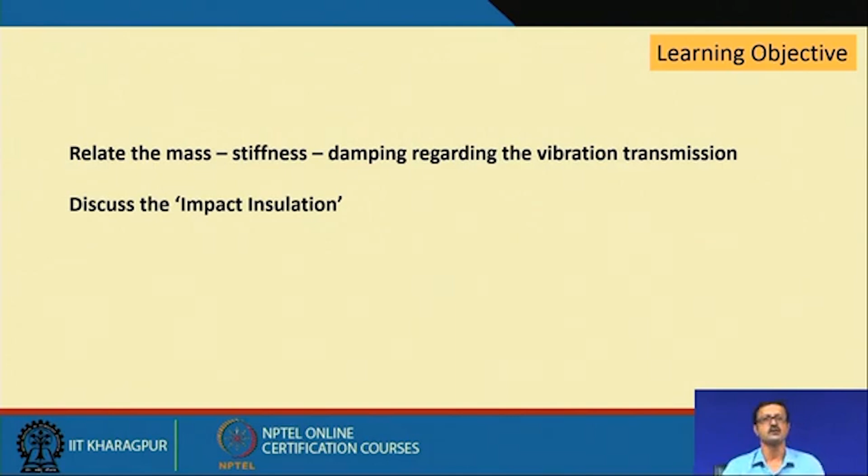Welcome to the NPTEL certification course on architectural acoustics. We are now in the 7th week, and this is the last lecture on structure bound sound transmission 2. In the last lecture we discussed some primary parameters of structure bound sound and how it is influenced by those parameters. In this lecture we have two learning objectives: we will relate the mass, stiffness and damping in the vibration transmission point of view, and also discuss a bit of impact insulation.

Before we discuss the relation between mass, stiffness and damping, let us discuss the barrier of trenching. If you remember, in the last lecture we talked about the source, the path, and the receiver. Sometimes a structural discontinuity in the path gives you noise reduction, structure bound noise reduction.

Sometimes some kind of mounting in a particular machine will stop or reduce the propagation of sound from the source itself. Sometimes we have to protect a building or noise sensitive area from sound transmission, which can be done through the trench barrier.

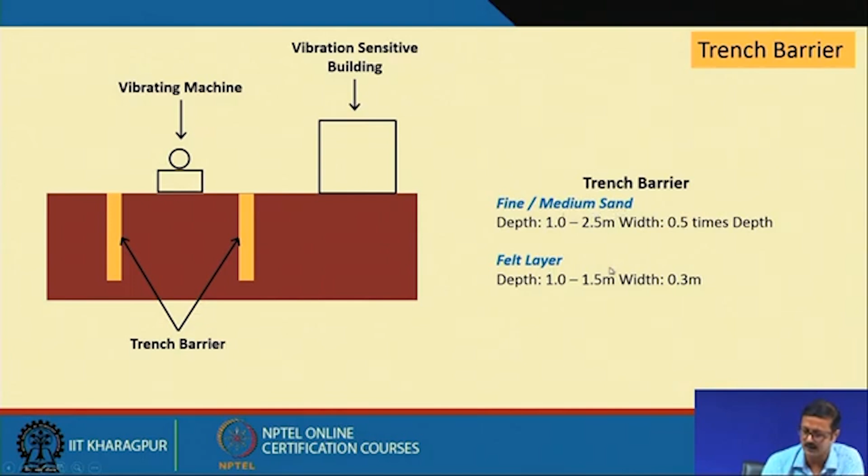In the trench barrier, two trenches are made in the soil or ground, and a vibrating machine is placed between them. This trench may be filled with fine or medium sand, or a felt layer, and with particular dimensions it can reduce the propagation of sound. In this zone of soil or base, the amplitude of vibration will be very high.

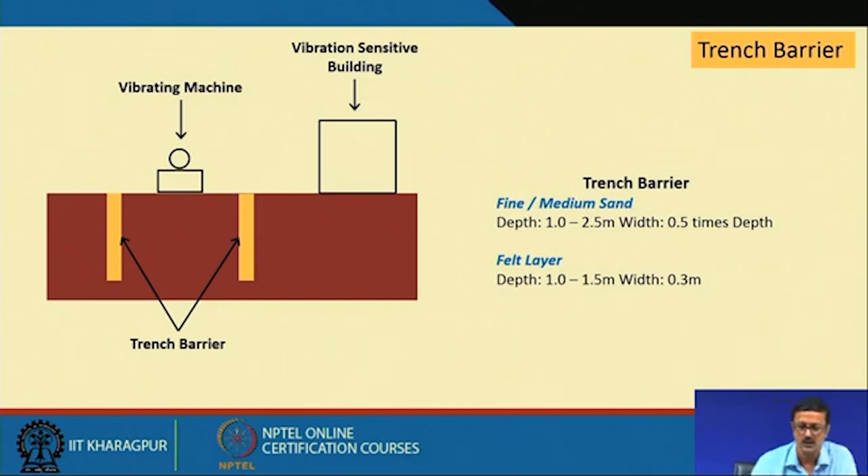But when it crosses into the trench, there is damping, and due to this damping and absorption of sound or mechanical energy there, the amplitude will be reduced. So, by virtue of this trench barrier, you can protect vibration sensitive buildings also.

We can also think of this trench barrier using a wooden or metallic barrier, where a railway or industrial area having a vibrating zone can be safeguarded. The propagation of vibration can be safeguarded through this trench, and the noise sensitive or vibration sensitive building can be protected by it as well.

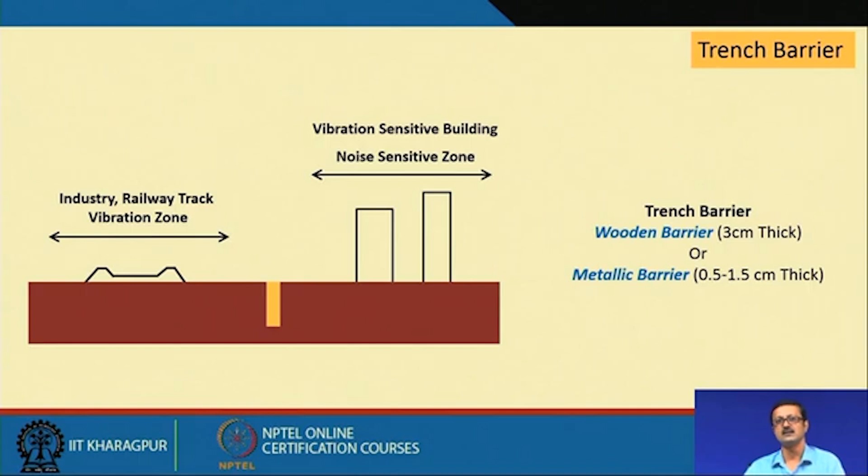So, we can use some kind of wooden barrier, metallic barrier, or some flexible padding systems as the trench.

Next, let us go to vibration isolation. In case of objects, machines and systems having a spring and damping, if you remember in the last lecture, we discussed free vibration where there is no damping - a machine freely vibrates with its own natural frequency. Here also it will vibrate with its own natural frequency.

The only change is that here a damping dashpot has been added. This means the machine is now on a damping layer, which can act as a vibration isolator and absorb the mechanical energy. So, what will be the fundamental free body diagram of this particular system?

A mass is acted upon by a force - an external or operating force - and due to this force, an equal and opposite resistive force develops: one through the system's stiffness, which is k into x, and one through the damper we have introduced, which is the damping coefficient c into x dot.

X dot is dx/dt, the velocity of the movement. Because of this force F and these two resistive forces, the mass will have some resultant acceleration, x double dot. And m times x double dot is the force experienced by the mass, which equals the resultant force F minus k x minus c x dot.

So, if you rearrange the equation, it will be like m x double dot plus k x plus c x dot equal to 0. This is again a second order differential equation, and the solution of this differential equation will be in exponent terms, with two roots r1 and r2 found from this equation.

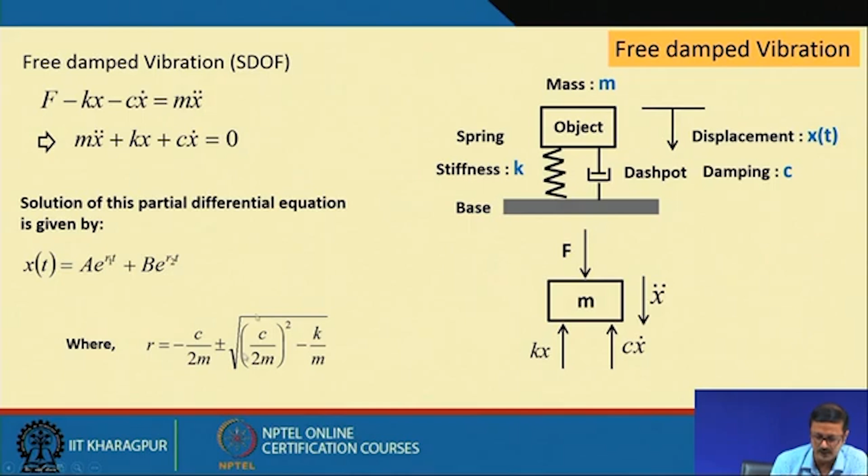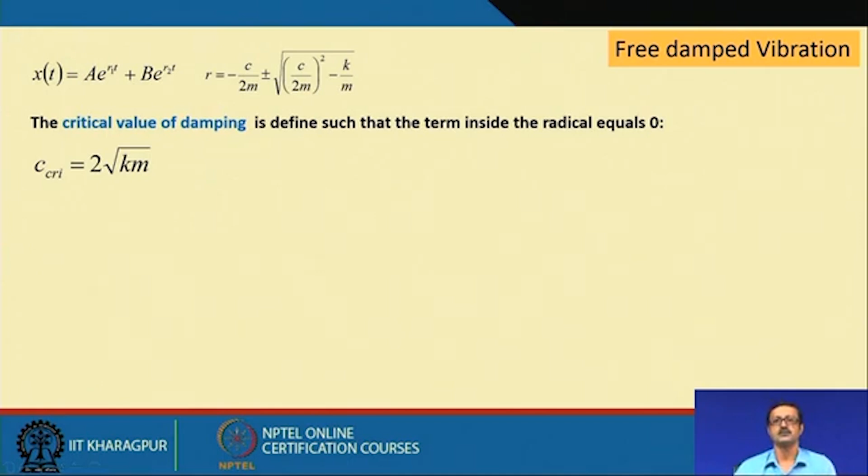By virtue of this damping criteria, a critical amount of damping can be found out, with C critical equal to twice the under root of k m. So what is critical damping? It is the fullest amount of damping a particular machine may need, but we can provide over and above that also.

Sometimes we can give some kind of under damping case also. So damping has to be provided by virtue of some kind of layer, damper, spring, or flexible padding. This damping factor is defined as xi equal to C by C critical, where C critical is twice the under root of k m, and C is the actual value of the damping provided by the layers.

Please remember that C critical is a parameter that depends upon the mass of the machine which is going to be vibrated and the system stiffness, whereas C, the component which is actually going to be provided, comes from the particular layer's damping characteristics.

So one possibility is that C is less than C critical, where xi is less than 1, which is the under damping case. There can be another possibility where C is exactly equal to C critical, so xi equals 1, called the critical damping scenario. And there can be another situation where C is more than C critical and xi is more than 1, which is the over damping scenario.

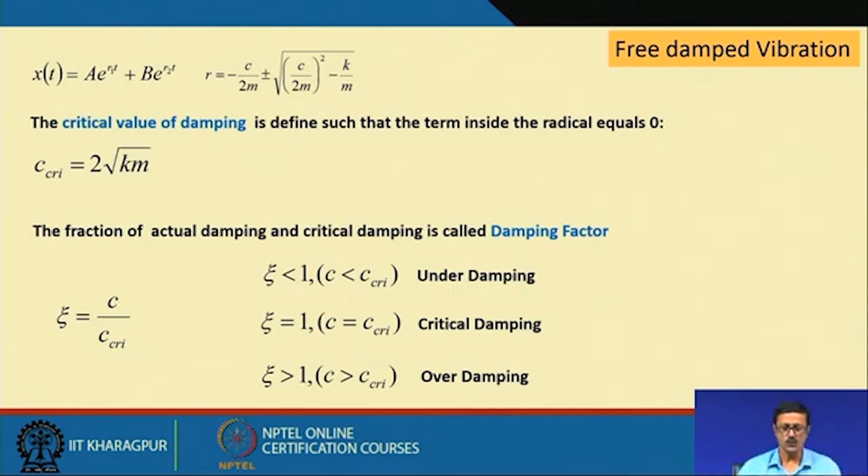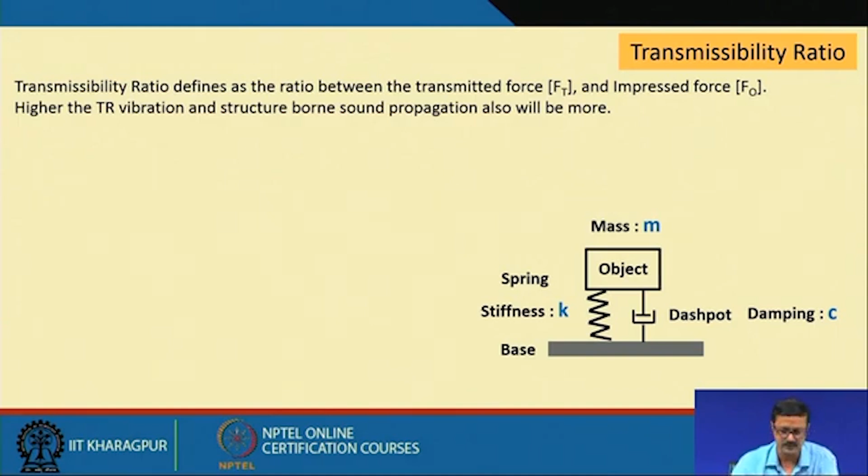So which one is good and which one are we going to adopt? Let us see. Suppose there is a mass, and this particular object's mass, its stiffness and the damping is there. So it is a particular vibration scenario.

There is a force, the impressed force because of the operation, which is F naught, F O, and because of this force and all the mechanism happening, it has transmitted some kind of force also, F t. The ratio of this F t by F o, the transmitted force by the impressed force, is called the transmissibility ratio.

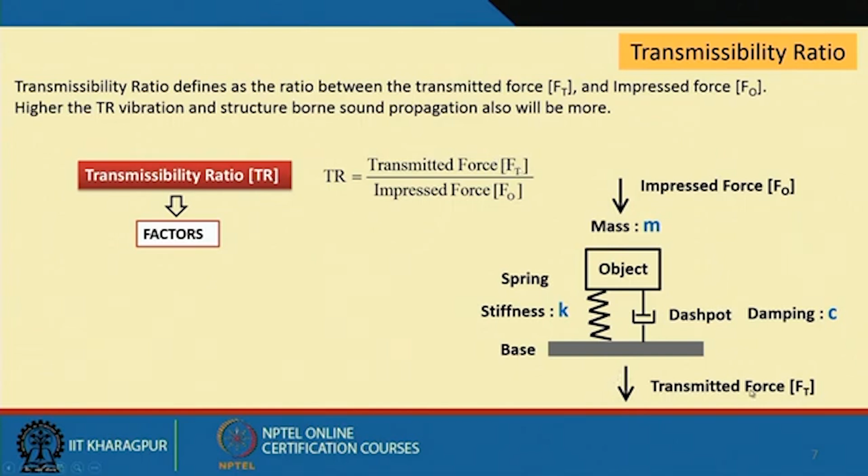Transmissibility ratio - and this transmissibility ratio formula, if you just see, this T r has to be minimum. Why does T r have to be minimum? Then whatever F naught may be, F t will be minimum. And as F t will be minimum, the transmission due to this vibration will be minimum and noise propagation will also be minimum. So what are the factors that will play a role in this T r?

Let us see. The first factor is the natural frequency of the machine. A particular vibration system has its natural frequency by virtue of its mass and stiffness.

Next is the operating frequency of the machine. Again, what is operating frequency? If you start the machine, with some electricity or other energy the machine starts vibrating, the pump starts pumping water, the AHU starts sending air. So that particular operation time, this operating frequency, actually happens to be there in this particular system.

So operating frequency may not be fixed. Suppose there is a voltage fluctuation, so operating frequency may change due to that. There is some kind of mechanical problem in the gear or assembly, operating frequency may change due to that too. So there is a kind of set of operating frequencies because of those things, but there is a designated operating frequency for a particular machine when it is running in full and idle condition.

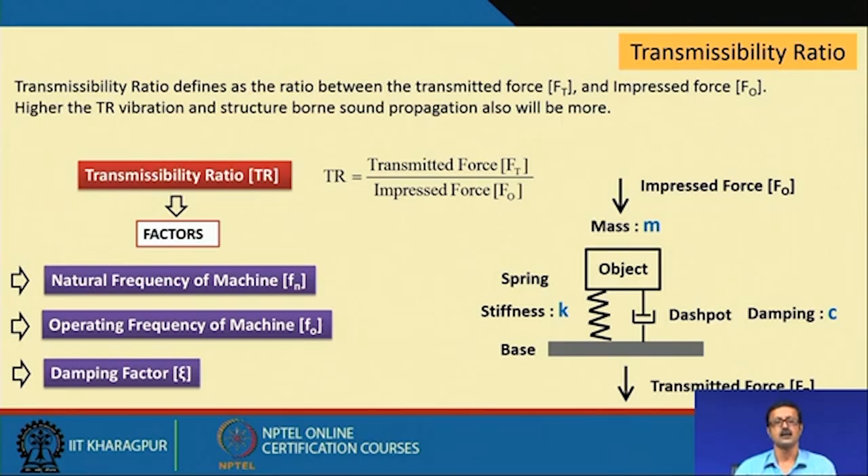What is the third parameter? The third parameter is the damping factor. So if you use more amount of damping - critical damping, over critical damping, or under critical damping - because of that, your propagation of sound and your transmitted force will change. So these are three important factors that will play a role in the transmissibility ratio.

Now, let us see how these three factors can come through an equation, and I can actually find out the TR, the transmissibility ratio, if I know Fn, Fo and Xi.

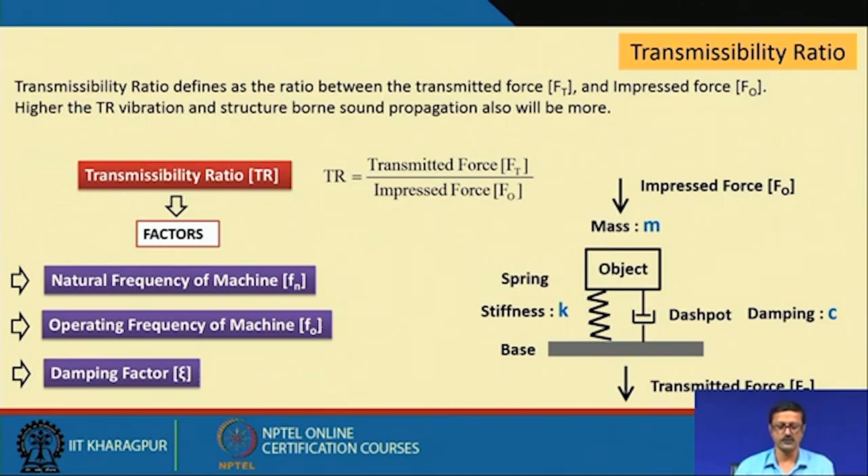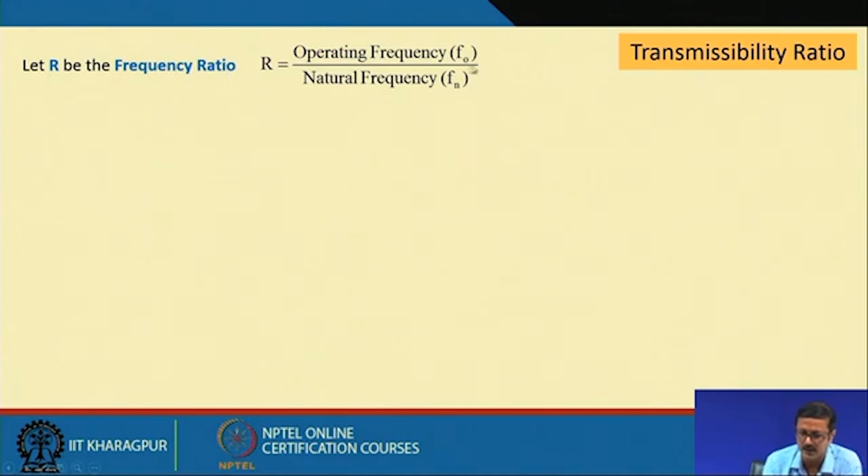Now, if I say that R is a frequency ratio, that is F naught by F n, I can reduce this big equation to a smaller equation. I am just replacing F naught by F n with capital R, nothing else.

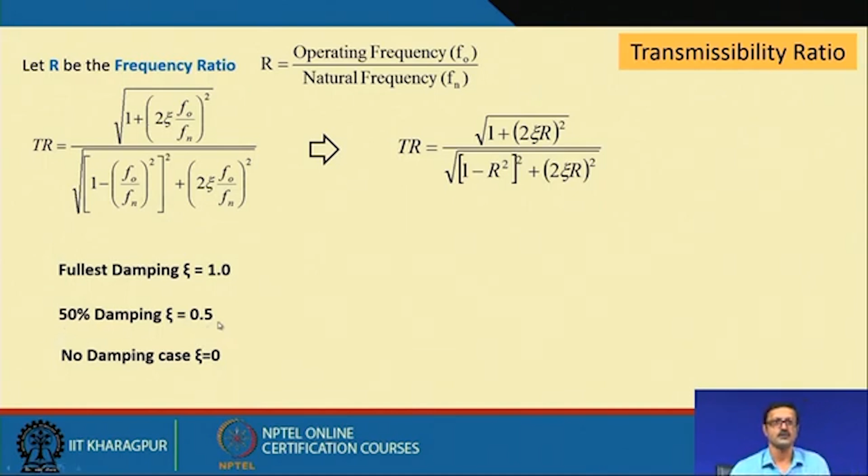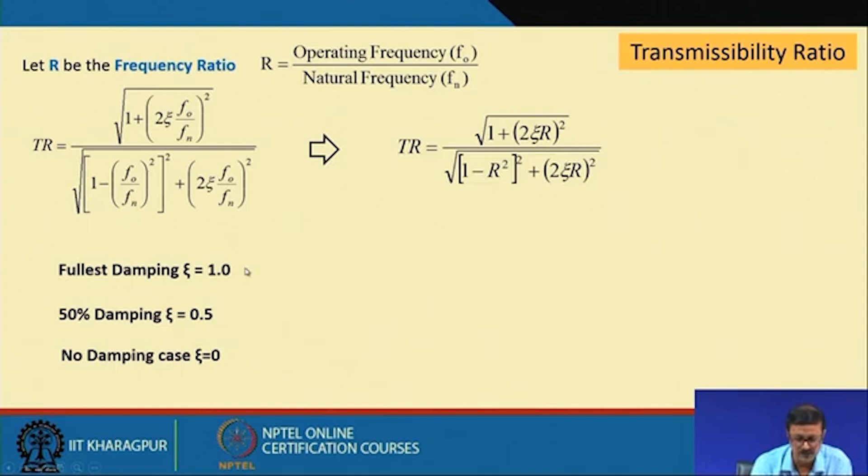Now there are three criteria. One is fullest damping, where I provide Xi equal to 1; this is the critical damping, the fullest amount of damping. The second case, I provide 50% of the damping, so Xi equal to 0.5. Another case, I provide no damping, Xi equal to 0—I just place the machine on the floor itself without any added flexible layers. Let us see how this Xi value changes the TR value.

The first case is where Xi is equal to 0, no damping. So if I put 0, this becomes 1 and this also becomes 0, and the under-root comes out as 1 minus R square. The TR equation is now very simple: 1 by 1 minus R square, where R is equal to F naught by F n.

Then the next one is fullest damping, so Xi is equal to 1. If you put Xi equal to 1, you get this: this is 2, 2 square is 4R square, this is also 4R square, and this remains as 1 minus R square whole square.

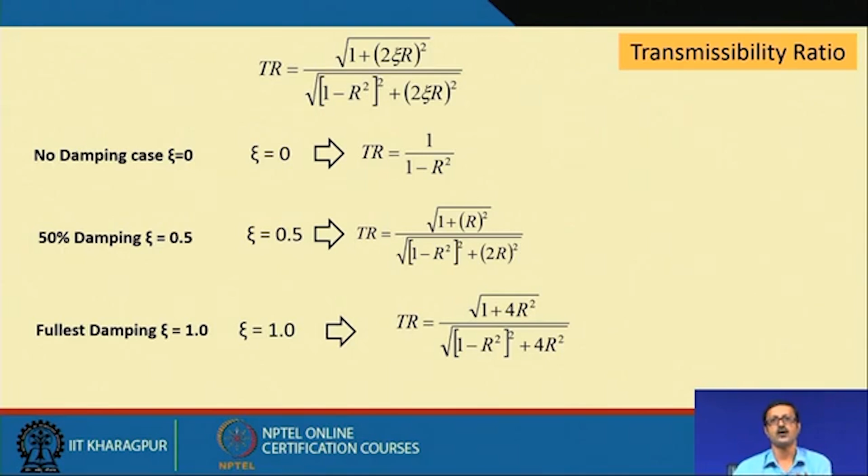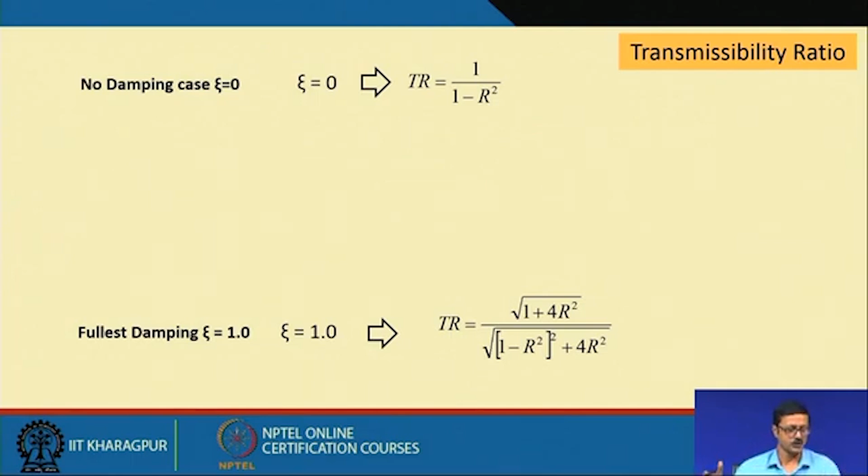You see, for the Xi equal to 0 case, when no damping is provided, if the frequency ratio is 1—that is, your operating frequency equals your natural frequency—the transmissibility ratio is infinity. That means the sound will propagate infinitely, the transmission force will be infinite. That is resonance, the resonance effect, created when you take no consideration of damping.

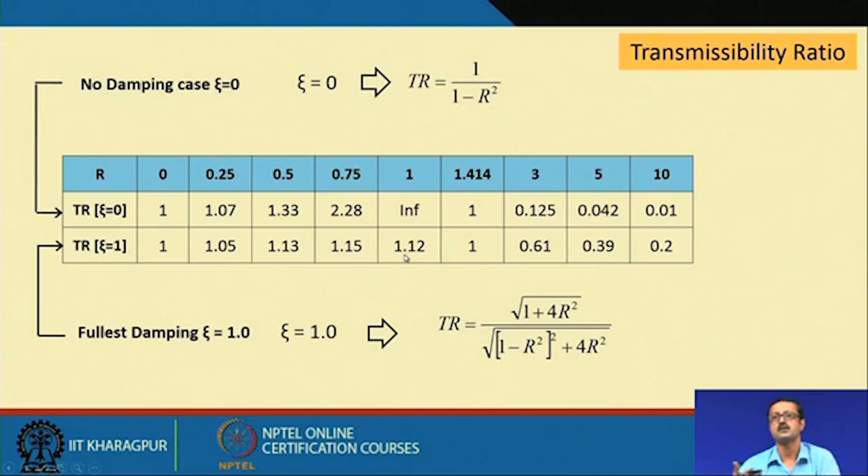Similarly, if it is 1, when it is equal, you have provided the fullest amount of damping, reduced from infinity down to 1.12, only a 12% increase in the transmission of the operative force.

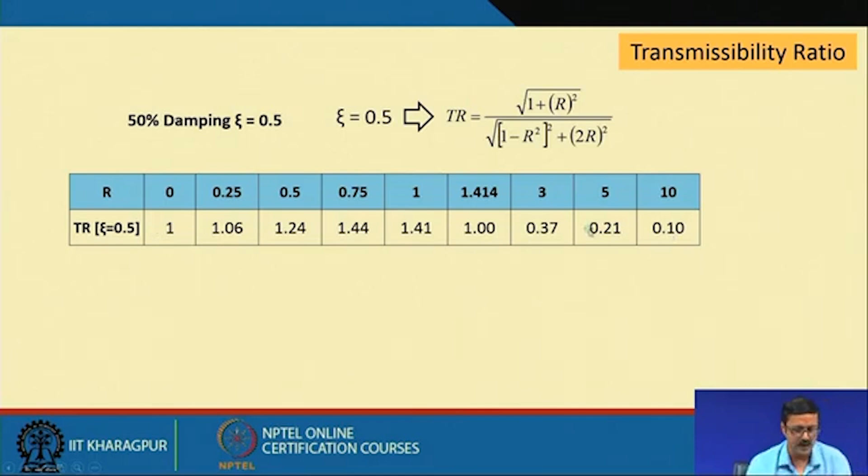So we can think of some kind of damper in a particular machine, below the machine, to reduce the propagation of sound. But my dear, this is not so easy.

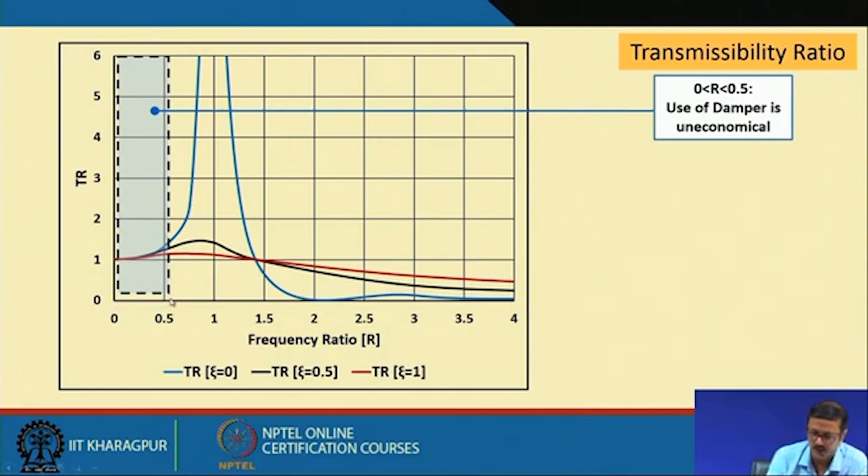If I go back, at 0.25, if you do not give anything it is 1.07, if you give the fullest amount of damping it is 1.05. See the change - giving nothing is 1.07 and giving 100% is 1.05, only a 0.02 fraction of change. That is why I have written that in zone 1, 0.0 to 0.5, use of a damper is uneconomical. You can give it, but only a slight change will occur.

The next zone is from 0.5 to 1.41, or root 2. In this zone, if you see, if you do not give damping, it will fly away - the TR is very high, infinite in fact at 1. And if you give damping, it reduces to maybe less than 1.5 or so.

So if your frequency ratio is in between 0.5 to 1.5, use of a damper is highly necessary. You have to give the damper, otherwise it will propagate the sound or vibration like anything.

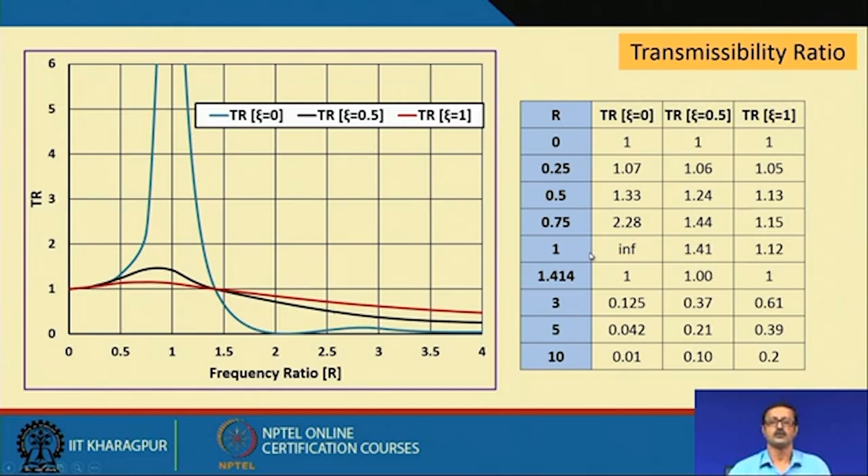Again, if I go back to this particular table, this is in this zone. So suppose at 0.75, if you do not give damping, it is 2.28. If you give full damping, it is 1.15, or if you give 50%, it is 1.44. So you have to give the damping over there. At 1, it is obviously infinite, and it reduces down like that. But in the case of root 2, all are equal.

Now, this is the second zone. So, you have to give the damper for those zones if your frequency ratio comes in between 0.5 to 1.5. Now, there is a third zone also.

The third zone is when your frequency ratio is greater than 1.414, or root 2. See what happens. If you do not give damping, follow this blue line, after the root 2 line. If you give the full amount of damping, you are above. So what does it mean? If you give the full amount of damping and your frequency ratio is higher than 1.41, or root 2, you are enlarging your TR value. You are enlarging your TR value by putting this damper.

So, use of damper is prohibited. You should not use the damper if the frequency ratio is more than root 2.

If you see the table once again, suppose your frequency ratio is more than root 2, say 5. If you do not give any kind of damper, it is 0.042. If you give the full amount of damping, your TR value is 0.39. So why should I give damping? Why should I give even 50% of the damping also? Because it gives me 0.21, whereas it is 0.042 without damping.

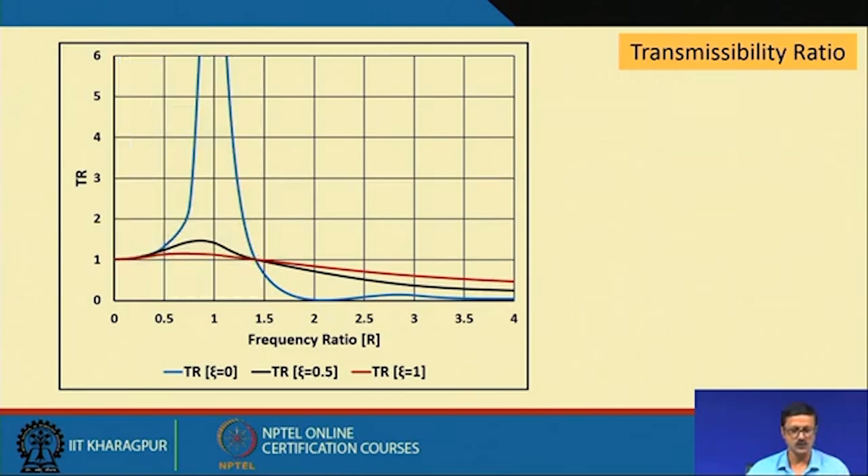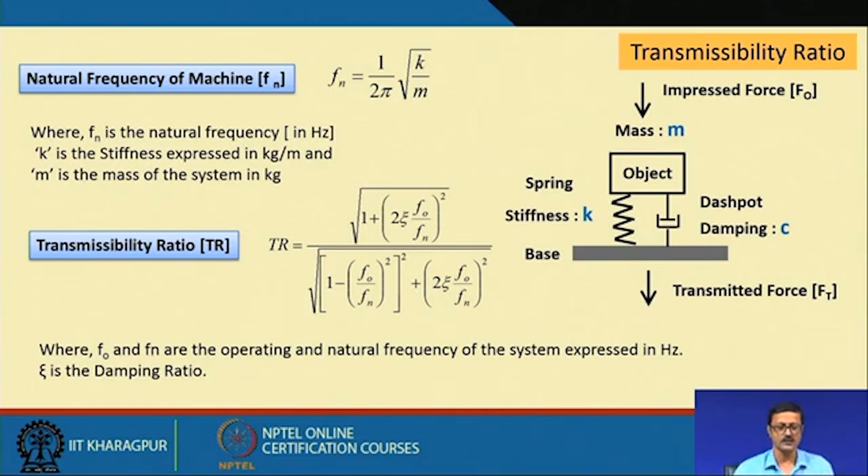By virtue of this particular equation, which I have told you is very tough to derive mathematically, it has a very interesting role to play in vibration transmission. It suggests that just closing my eyes and putting some kind of damper in a particular machine is not actually going to help me. I have to first find out what is the operating frequency, what is the natural frequency. I should know what is the ratio between them.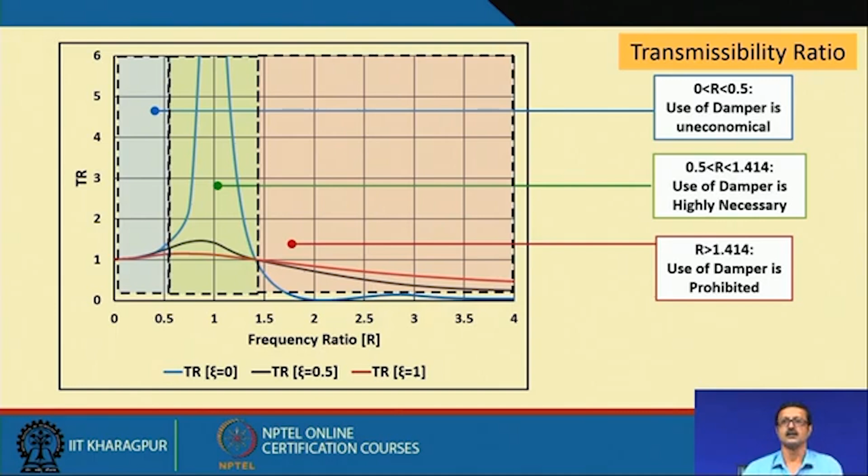If the ratio is in the first zone, it is uneconomical. If it is the second zone, I have to provide the damper, and if it is in the third zone, we should not use the damper, because if I use the damper, the TR will be much higher, and it will actually propagate a much higher amount of vibration.

So next let us go to the impact noise. Impact noise is noise made on a particular horizontal floor by some kind of impact, maybe a footstep, maybe some kind of machine tapping on the particular floor, or maybe sometimes a dance floor or some aerobic activities. So, for that also, sometimes it happens that the noise will propagate from the upper floor to the lower floor because of this impact.

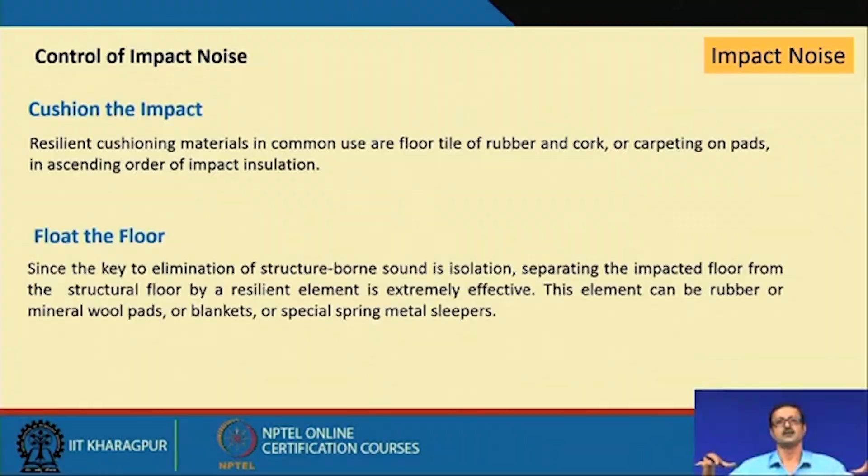There are various ways to control this. The first one, the cushion, is the best one for impact control. We can create some kind of floating floor, where you use an arrangement so the particular floor is floated over the structural floor. We can also use a suspended ceiling system with some kind of absorber and a cavity attachment below the structural floor to avoid the propagation of noise from the floor above to the one below.

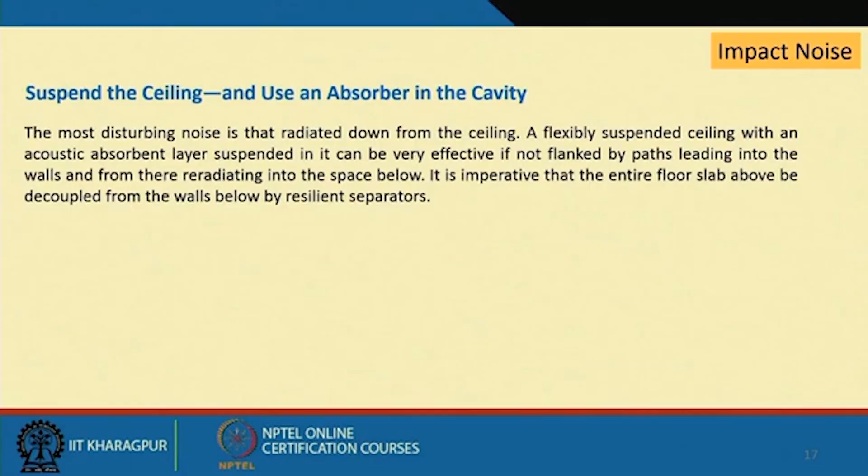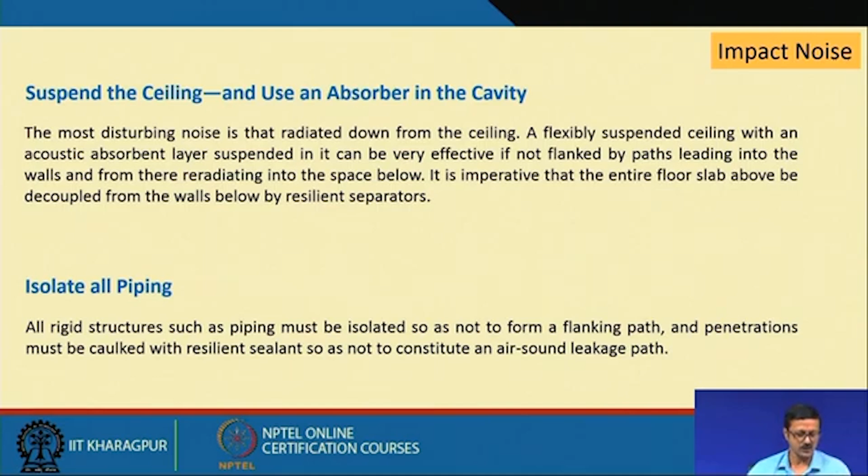And also we can isolate all kinds of piping and other work which is actually propagating some kind of fluid and causing some kind of vibration, and we can isolate that to reduce down the impact-borne sound also.

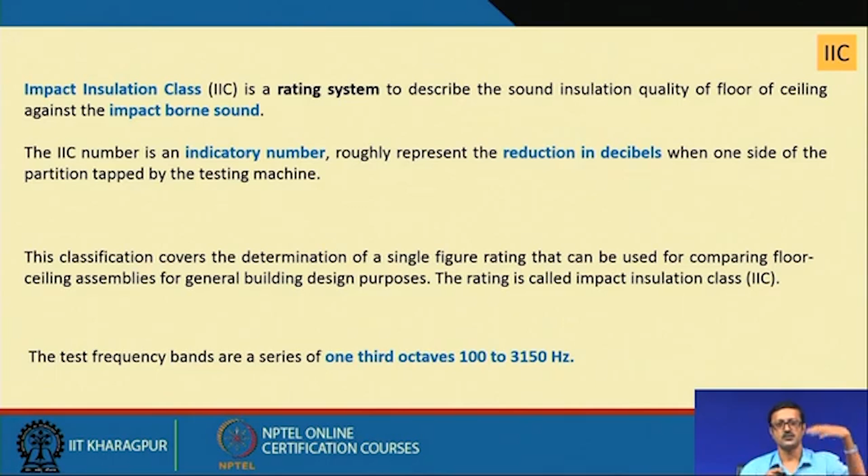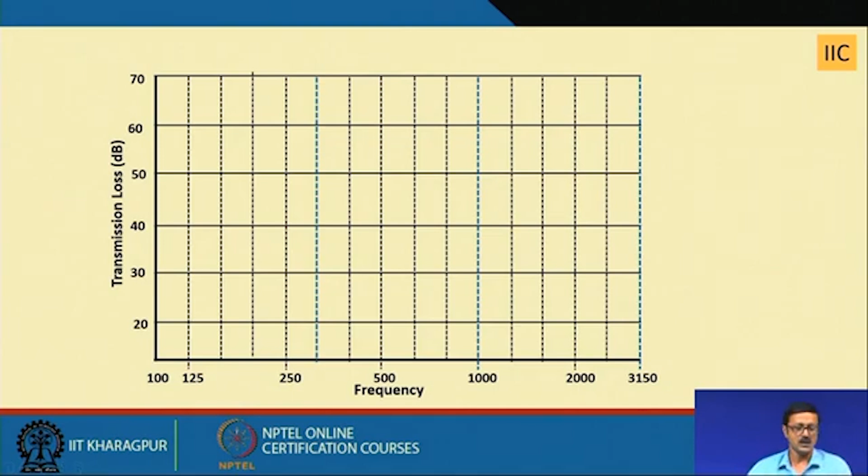So similar to the STC, that is the sound transmission class, there is also an impact insulation class, or IIC, rating system available for any kind of floor, where again the 1/3 octave bands from 100 to 3150, those 16 1/3 octave bands, are taken, and a particular single number is found to give you some sense of the reduction in dB from the source to the receiver area. So again it has to be done like this: it is the 16 frequencies, and you test each frequency and see what is the reduction in dB, and this will be plotted, and the way we did in case of the STC, the same procedure we can follow.

If you remember, we take the first 6 frequencies, take the average, draw a straight line, then decrease by 5 dB within that 5 dB zone, and then again decrease by 15 dB within that 15 dB zone, we get this contour. In the earlier case it was called the STC contour; in this case it is called the IIC contour.

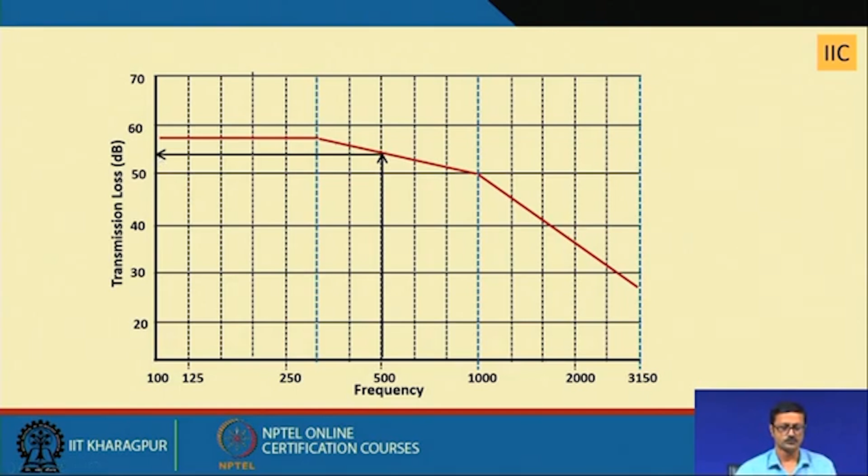Remember, this is the other way around compared to the STC contour. Similar to the STC contour, corresponding to the 500 Hz sound, when it strikes this contour and you go vertical then horizontal, this particular value in the transmission loss case will be the IIC value of this particular material or floor.

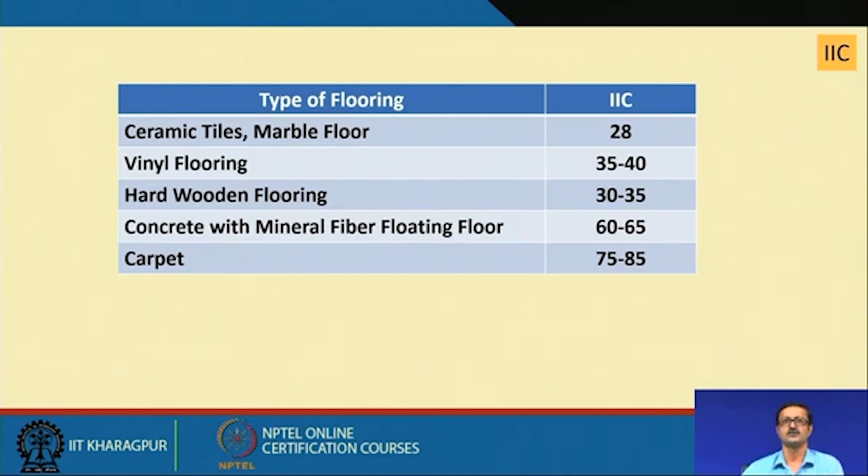So there are some typical floors or materials used for any kind of floor, and I have listed the corresponding IIC values. Ceramic tiles give a low value, vinyl flooring is also very low, but if you go for carpet or any kind of floating floor with concrete and mineral fibers, the IIC value will be very high.

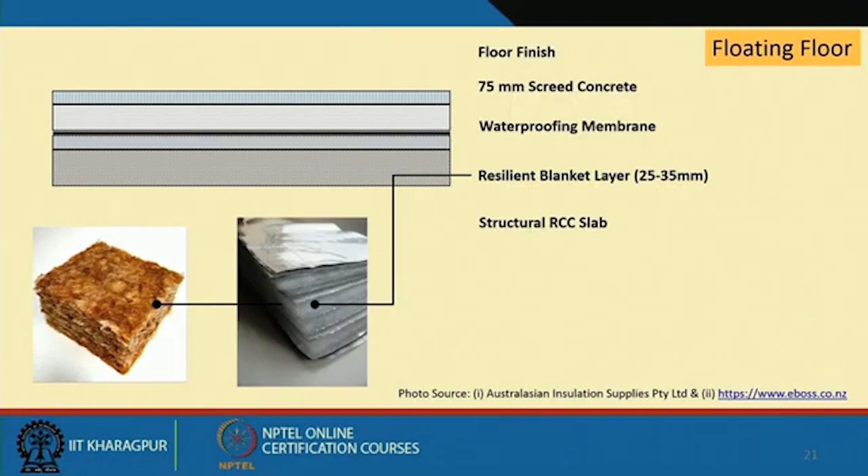I have also sketched some cases of a floating floor construction. This is your structural slab, the bottommost layer. Over that we place a resilient blanket, then a black thick line representing the waterproofing membrane, and over that a 75 mm screed concrete layer, and above that is your desired floor finish. This is a compacted floating floor construction where the structural slab, top floor finish, and screed concrete layer are sandwiched with the waterproofing membrane and the resilient blanket.

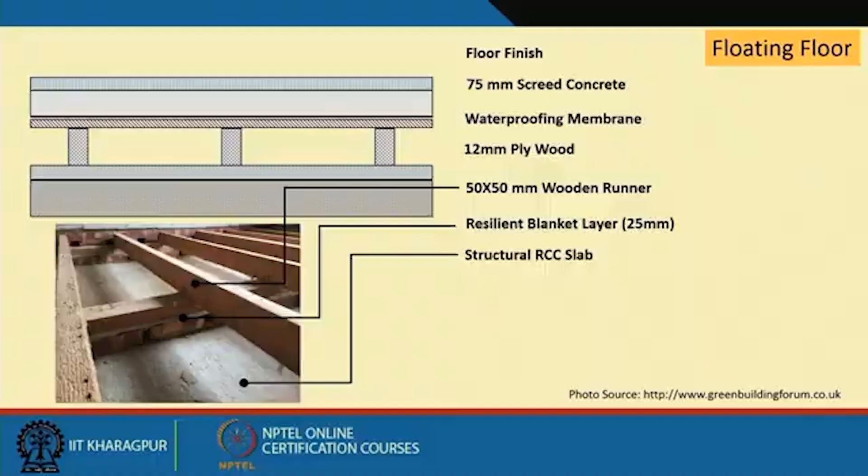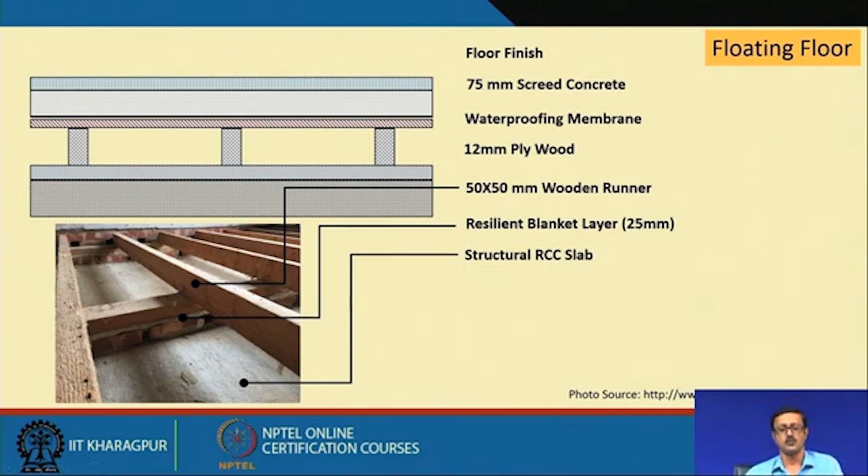So here what happens is that the structural slab is isolated from the floor above by virtue of this wooden member and some air gap in between, and also having a soft resilient blanket layer, which will definitely absorb the footstep noise or impact-borne noise.